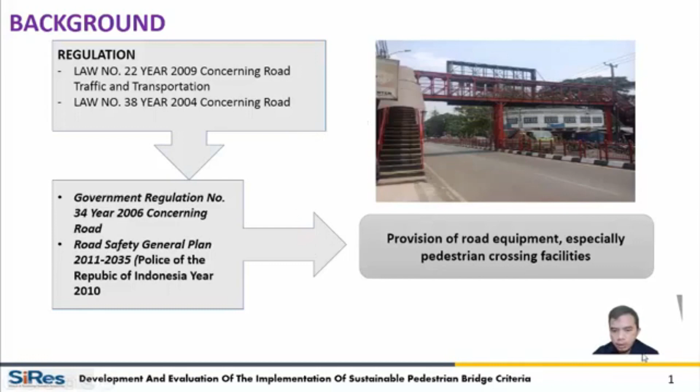In this case, pedestrians. To overcome traffic conflict and accidents through existing regulations, the Indonesian government has made it mandatory to provide pedestrian facilities, one of which is a pedestrian bridge. However, based on the research results, the fact in the field found that the level of utilization of pedestrian bridges is low. Many variables affect the low utilization of the bridge, both structural components, architecture, and other utilities that cause pedestrians to be lazy to use the bridge.

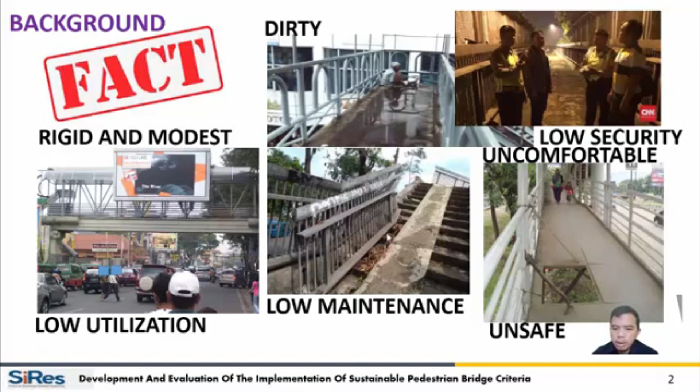Dirty, dark conditions, too high sloping stairs, damaged buildings, and not being protected from sunlight and rain are other factors that cause low bridge utilization. Based on this fact, we researchers at the Research and Development Center for System and Traffic Engineering try to build ideas on how to increase the number of road users. We combine several variables to create a single concept that we call a sustainable and aesthetic bridge.

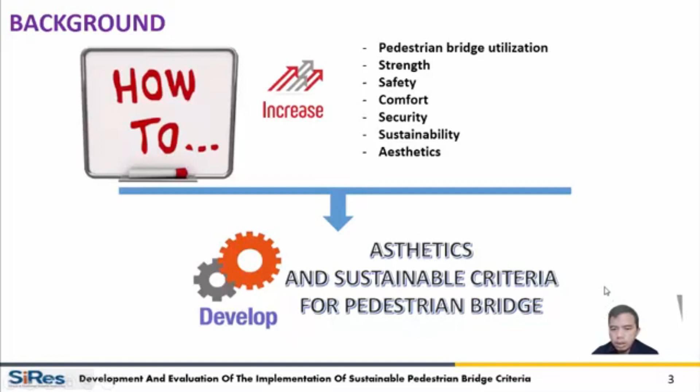The initial stage of the research is to collect literature on regulations, previous studies, and other sources to obtain information and current conditions regarding provisions, procedures, standards, and facts in the field that affect bridge utilization. Next, we built the concept of an aesthetically sustainable bridge by involving stakeholders. The discussion results about the concept of aesthetic and sustainable bridge were applied to prototype models.

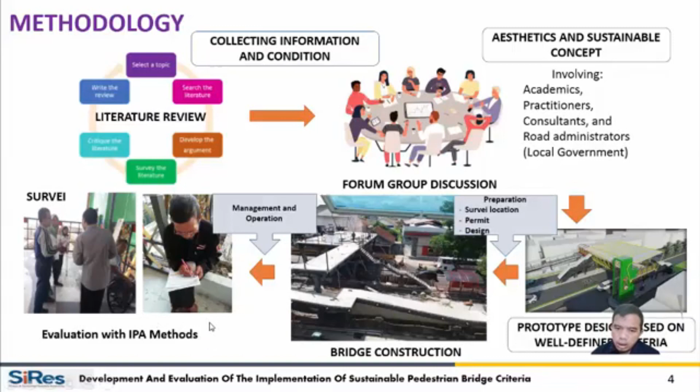At first, we used a third party to design and build under contract. However, on the way, we encountered obstacles, so we completed the bridge construction by self-management. Implementation of development took 1 year and it started operating on 10 May 2019. After the bridge started operating, we evaluated it by conducting a primary data survey consisting of data on the number of pedestrians and vehicle volumes and information on performance and importance regarding the implemented criteria. The level of performance and importance is obtained through a questionnaire and interview with a sample of 60 pedestrians.

In applying a pedestrian bridge with a sustainable aesthetic concept, 2 criteria must be met, namely the planning criteria and the design criteria. Planning criteria include conformity to need analysis and agreement to the site analysis. The result of data processing and evaluation of the planning criteria show satisfactory results, namely meeting all predetermined criteria.

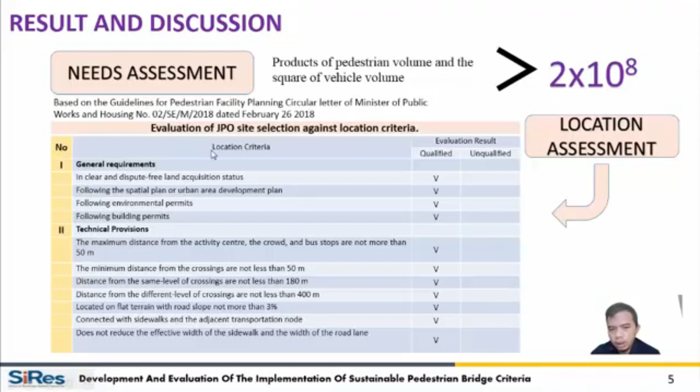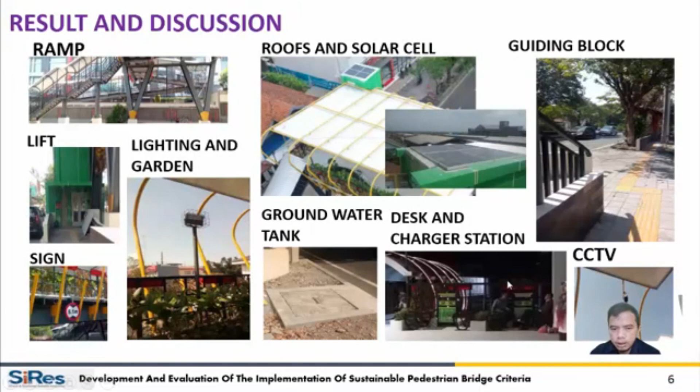The evaluation results show the distance between activity centers has satisfactory results both at the level of performance and importance, followed by lighting lamps that will provide a sense of security to users, especially at night. What is considered less important but has good performance is the ornament. For the ornament, we chose batik motifs that are characteristic of Surakarta residents as a local culture representative.

From the quadrant matrix, the provision of lighting and supporting facilities have a high level of importance, but the performance is not satisfactory. Lighting is seen as too luxurious and less artistic, while supporting facilities are expected to be more numerous and utilize solar cell energy than the current one. In a part that is less important and is considered low compared to other items, namely the garden, the park looks unkempt and dirty due to vandalism.

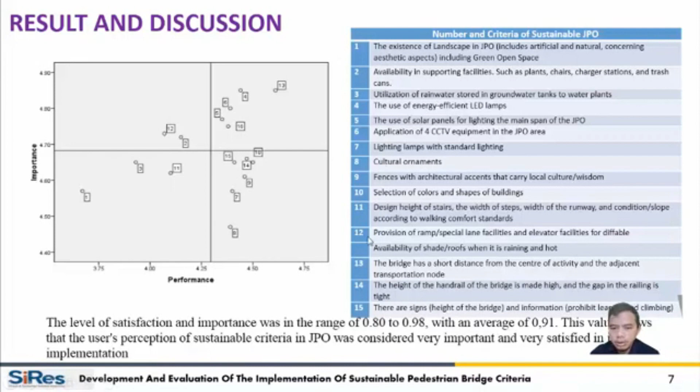In general, based on the evaluation result, the value of performance satisfaction and importance is in the range of 0.8 to 0.98. This shows that all criteria have almost the same level of importance to support a bridge that meets aesthetic and sustainable principles regarding safety, comfort, security, and other issues.

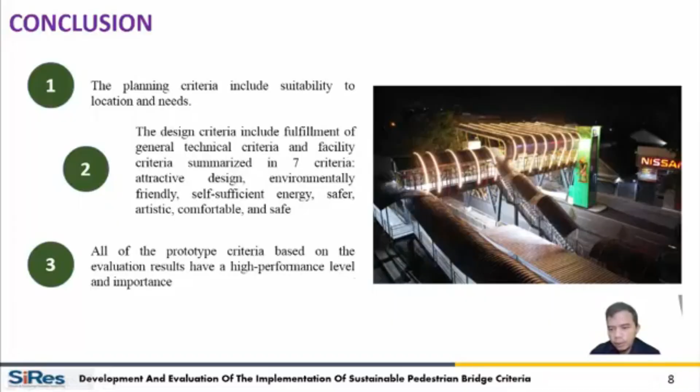In closing, we conclude that two general criteria must be met, namely planning and design criteria. Planning criteria include conformity to needs and locations. The design criteria include attractive designs, environmentally friendly, self-sufficient energy, safer, artistic, comfortable, and safe. All criteria based on the evaluation result have a high level of importance, and the performance of applying the criteria of the bridge has a satisfactory result.